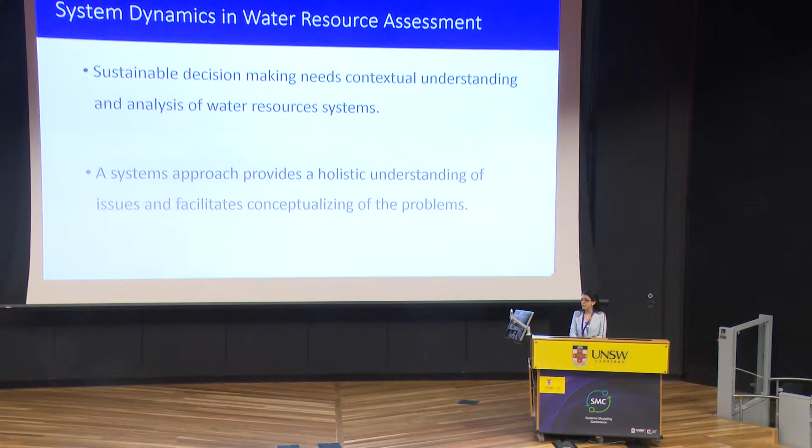One of the main things that we need for sustainable decision making is understanding and analyzing the water resources system and understanding well how the system is working. The system approach makes a holistic understanding of the system and facilitates conceptualizing the problems.

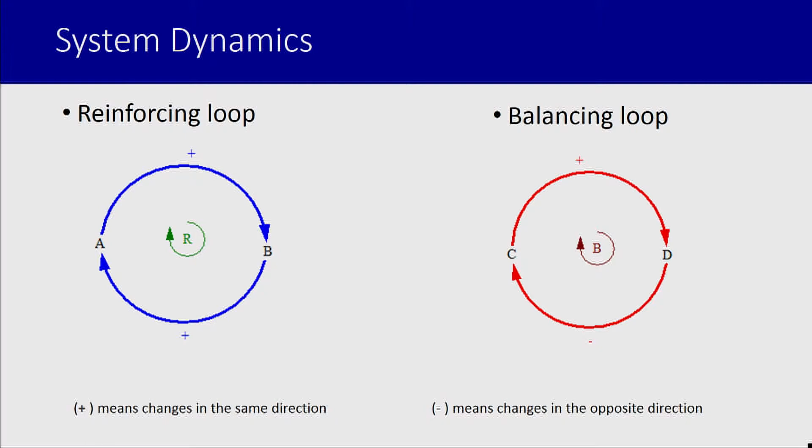Just reviewing the two main fundamental loops of systems thinking. In system dynamics, we have two different kinds of loops. I'm telling this just because I'm going to use it a lot during the presentation. Reinforcing loops are the loops that empower themselves, and after a while, they will be increasing or decreasing rapidly. Balancing loops are the loops that try to control the systems. They control and balance the changes in the system.

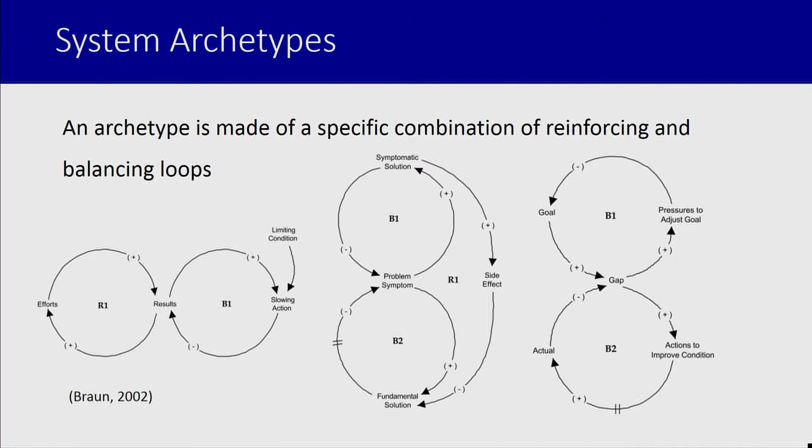I'm going to use system archetypes in one application in water resources management. But what does archetype mean? An archetype is made of a specific combination of reinforcing and balancing loops. It can be made of two or more balancing and reinforcing loops together. Each of them tells a story and a pattern of the behavior that the system is showing.

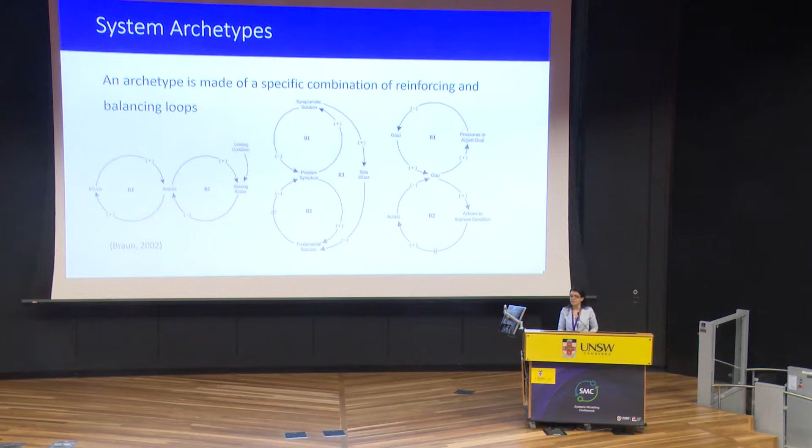These archetypes usually are common stories that occur repeatedly in different contexts. It can be in water resource systems, in social problems, in business, management, everywhere. Many of them are recognized, and for each archetype, we have a selected solution. So if we recognize the archetype, we can find out how we can stop it and how we can control it.

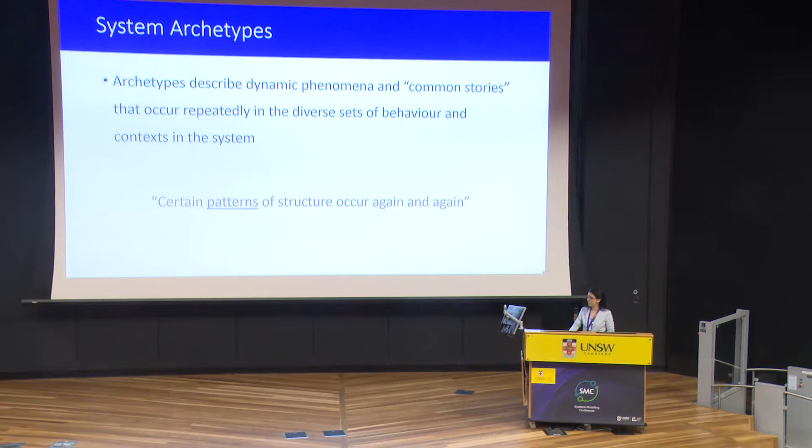Recognizing the archetypes will give the decision maker insight into the potential future consequences and side effects of their decision. And it can help them understand the root causes of the problem, not just the impact and the surface of the problem. At the same time, it can be used as a conceptualizing technique for further, more detailed modeling. The first step of breaking any dynamic archetype in the system is to understand them well.

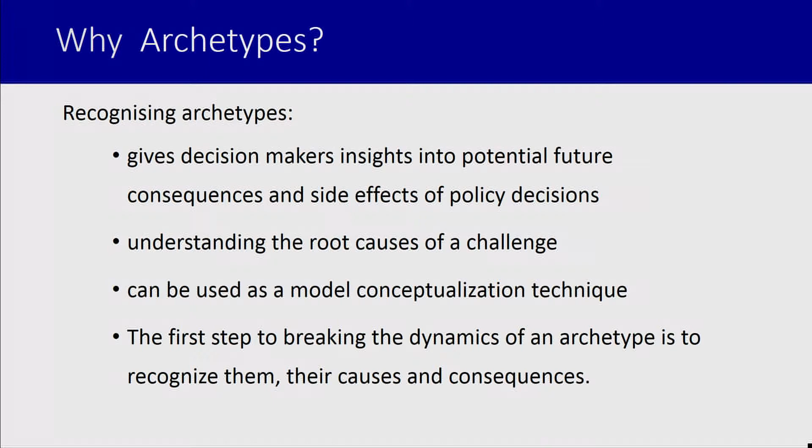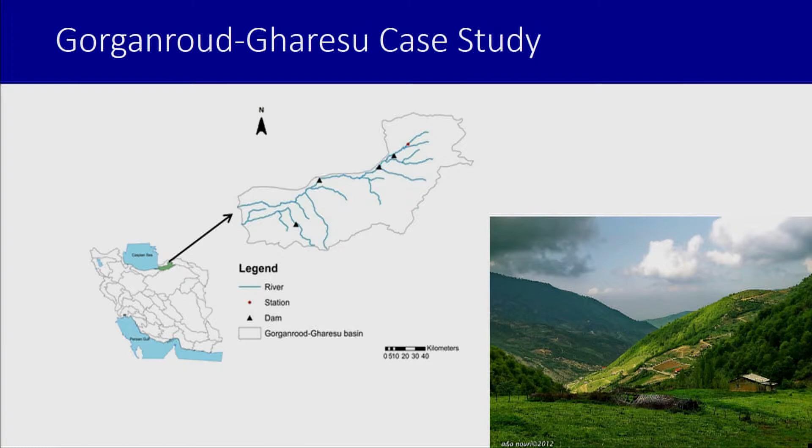The case study where I used this method is the Gorganroud-Gharesu case study. It is located in northeast Iran, next to the Caspian Sea. The basin has a mild climate with good rainfall. Everything is good in this basin, based on the environment. But it has many problems as well.

The Gorganroud-Gharesu economy is basically dependent on services, which is mainly tourism, because it has a good environment, dense forest, beautiful mountains. Besides that, they have good agriculture as well, and a little industry.

I used a simple methodology for system dynamics analysis of this basin. I started with a pre-assessment step, which means that I had a field visit. I spoke and had interviews with the people who lived in the basin, with experts, decision makers and managers, and I got their first idea of what the challenges in the basin are. Then I reviewed the reports and research in different sectors like environment, ecology and social, focused on the water resources.

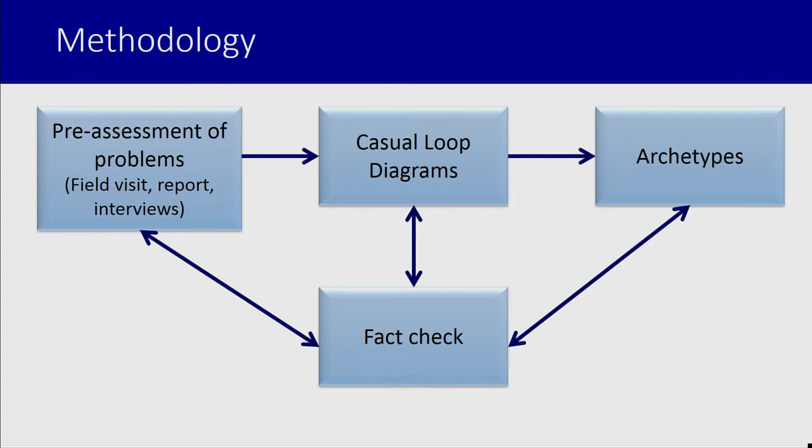Based on this pre-assessment, I made the detailed causal loop diagram, and in each step you should check the facts, because sometimes people will tell you something that is not based on true facts, it's based on what they guess. So to prove that, you need facts, even if you find just one report or the data. Or you can refer to the people's speech, but only if it is repeated many times.

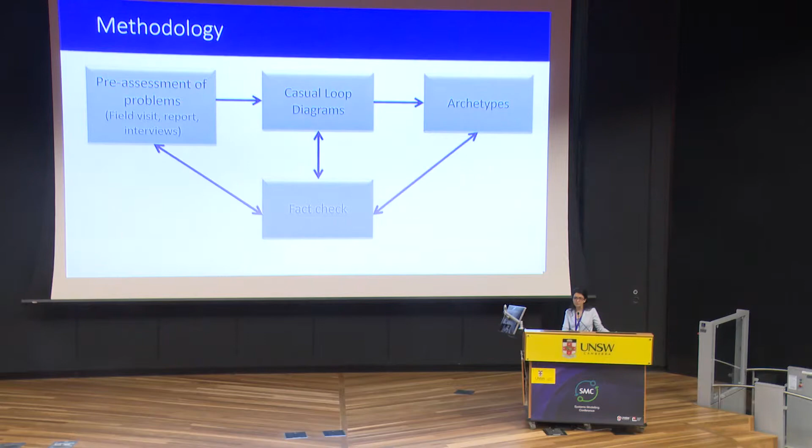Based on this fact check and the causal loop diagram, I got the archetypes and started to speak about what these archetypes mean in this case study and how we can use them to do the water resource assessment.

Okay, the main issues that I gained from the interviews and the reports were, first of all, growing water demand. It means that in the past years, like 50 years, many dams were built in this basin, and many wells as well. But all of the time, we had demand that is not covered. So always we had water shortage. And this demand is growing.

The other thing that people mentioned, but I didn't find any fact for that in the first step, was land use changes. People said that the forest is going out, we don't have enough forest, we don't have the forest as we did 50 years ago. And if you just have a look at the Google Earth picture, you find out, yeah, within the dense forest, you find a point that is like somebody cleared that area. And it's agriculture area, or you can find villages, or you can find something like a factory or something, which needs to be analyzed more.

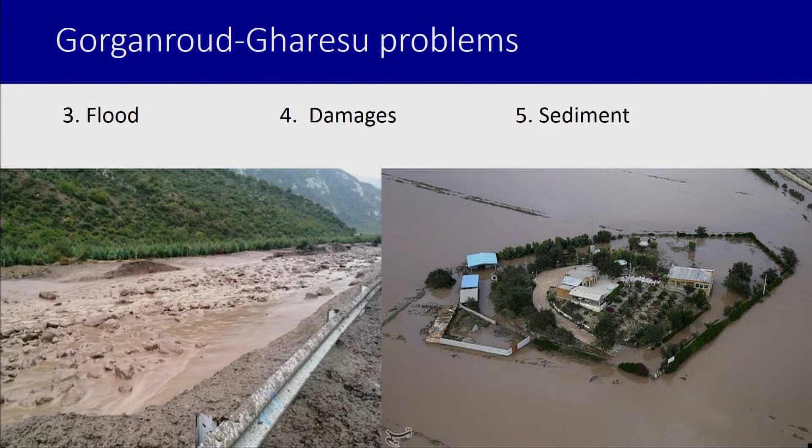Besides these things, every year there is flood in this area. Every year in the middle of the summer, a huge flood happens. In the last 10 years, it happened several times, and each time the damage was more than the previous time. And at the same time, people said that, oh, we have sediment problem. The dams are filling up with the sediment.

People speak about all of these problems and challenges separately. They said that we have flood problem, we have sediment problem, and different decision makers start to set up teams and researchers to find out the reason of the sediment or flood or water demand problem. But we start to think about all of them with each other. Let's see how systems thinking can help us to understand these problems and challenges better.

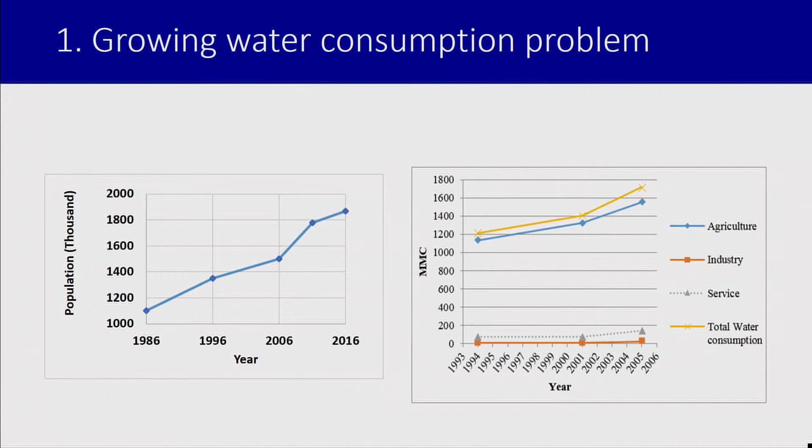If we look at the data, we find out during the last 40 years, the population of the basin grew up so rapidly, and at the same time, the water consumption increased as well in the different sectors, but agriculture was the main one. This is the causal loop of the water consumption problem. It's a detailed one. Basically, it speaks about the main three economy sectors that I mentioned before: the industrial water need, the services water need, and the agriculture one, and how they are reinforcing and increasing during the time.

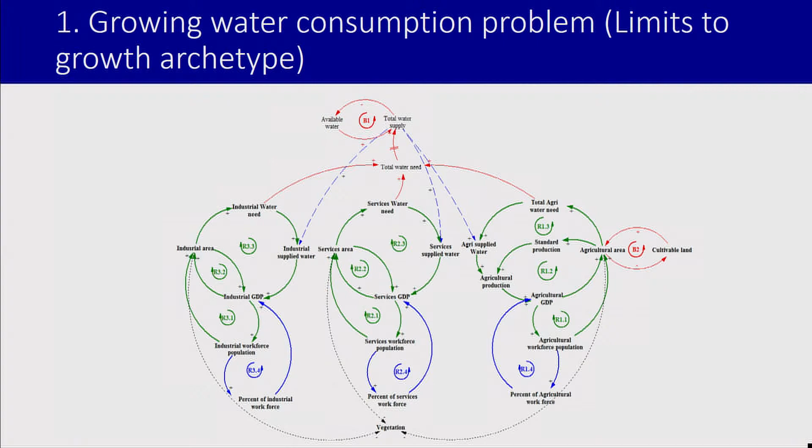Which means that when you give more water to industry, it will produce more GDP, and after a while, it will be richer, it will grow up, and more people will start working in the industry. And this reinforcing will continue. At the same time, these reinforcing loops are using the same limited water resources which cannot cover this loop forever. And sooner or later, this system will collapse.

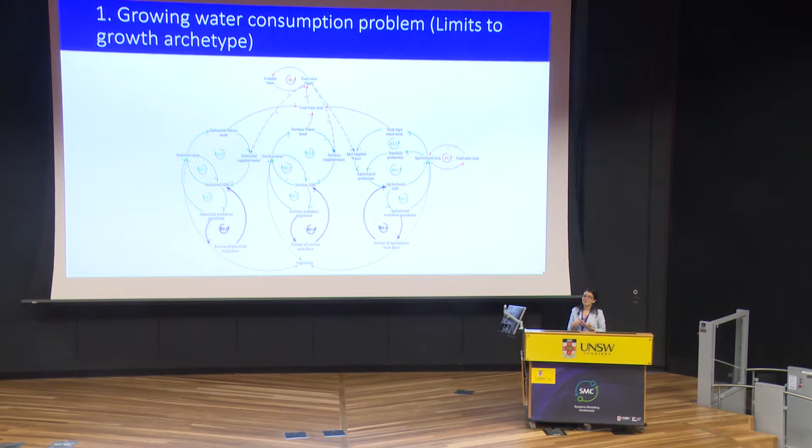Showing this detailed causal loop to the decision maker will make them confused. It's so complex to be understood. So I made it a little more simple. This one shows the main idea of the previous one, which is the limits to growth archetype. The limits to growth archetype tells the story of the problem when you start to use a limited resource, which couldn't continue forever. And if you don't control the reinforcing loop, this system will collapse.

So it will give the decision maker the idea of thinking about how they can control the driver, and show them what is the driver of water demand. In this case, the population was the main driver of the water demand problem.

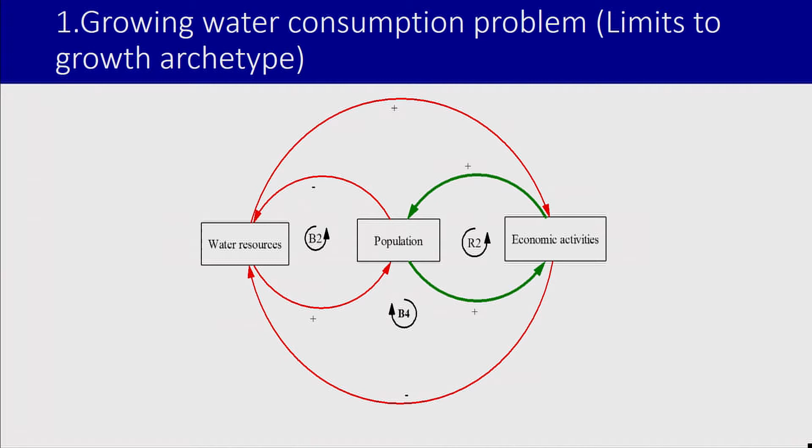If we think about the water demand problem in another way, we find out each time that we had water shortage, people start to think how they can supply more water for people. So they made a dam. After a while, there was water shortage again. It happens some years after that. So they made the second dam. After a while, it happened again, the third one, and then the fourth one.

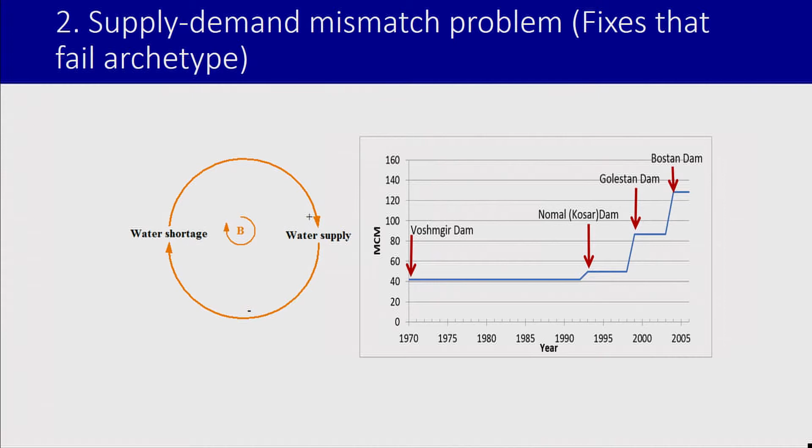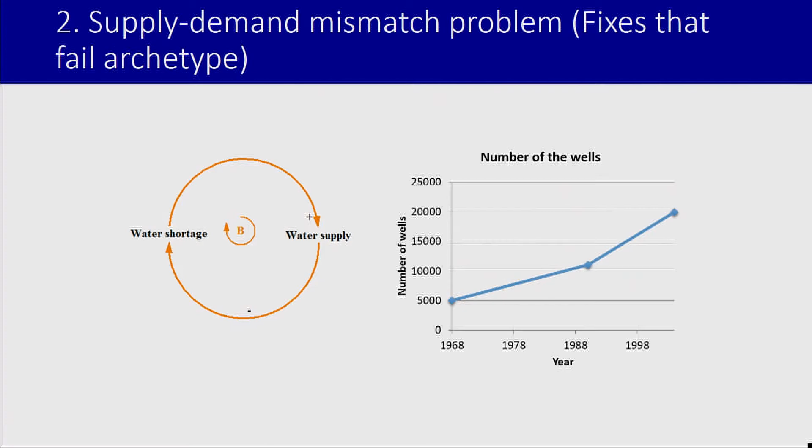Oh, the dams weren't enough, so they started to make wells. The number of the wells in this basin increased rapidly. Besides this data, we know that 50,000 illegal wells were built in this basin. So it means that people are using more and more water.

But we tried to solve this problem several times. Why does it come back to us rapidly? We call this problem the fixes that fail archetype, which means that when you fix the symptom of the problem and you don't pay attention to the fundamental driver of the problem, it comes back to you after a while, sometimes bigger and stronger.

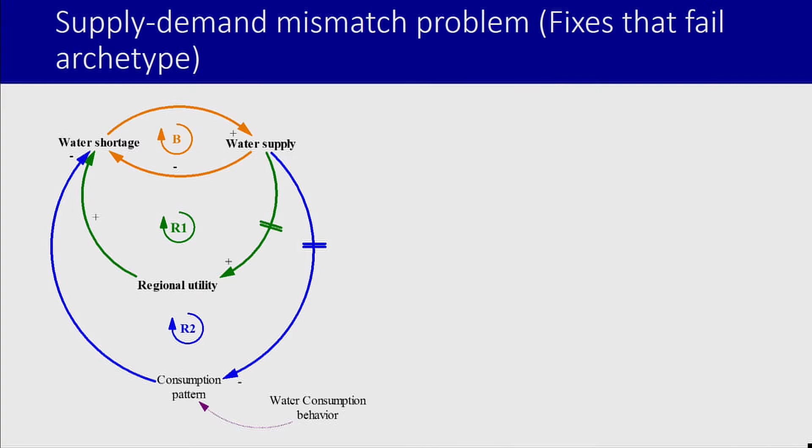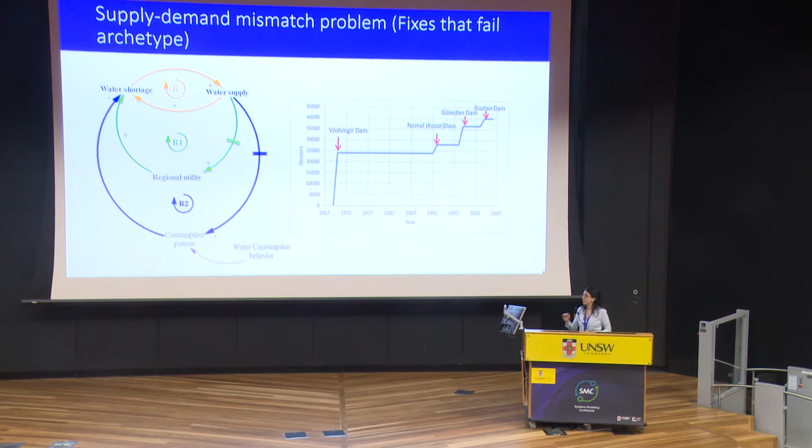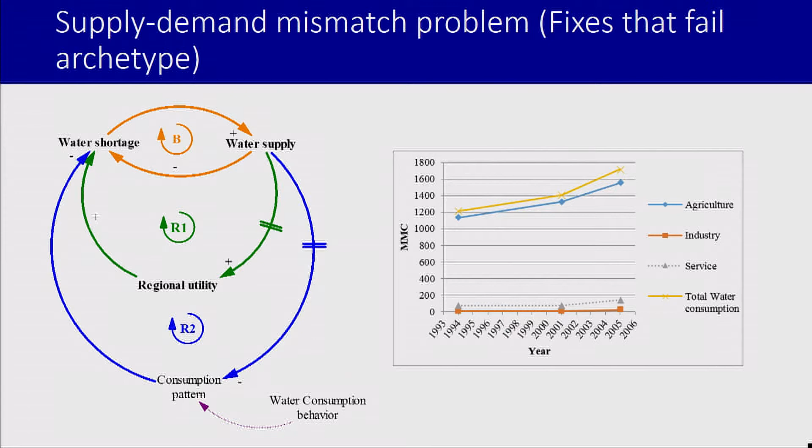In this case, when people supply more water and cover the water shortage, it gives people the wrong message that we have enough water. So they continue the way that they used water, and they continue that reinforcing loop. So we can see that each time the dams were built, the agriculture area increased as well. And this is the same data that shows that the consumption of the water increased as well.

In the case of the flood problem, decision makers usually tend to use the constructional solution for this problem. So each time they had the problem of the flood, they think that making dams or dikes can help to solve the problem.

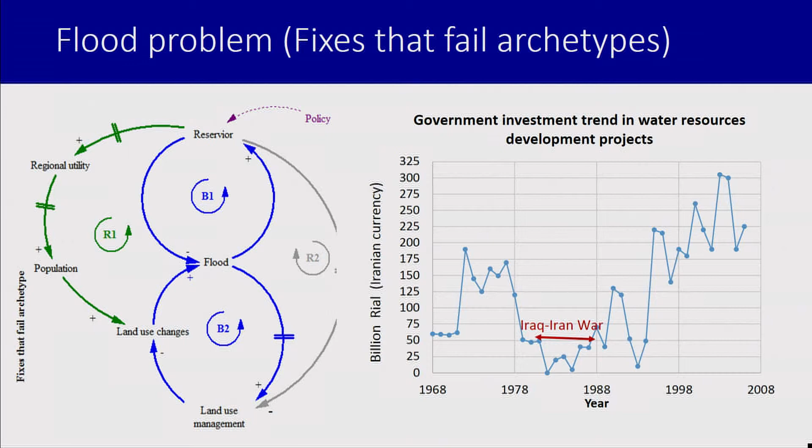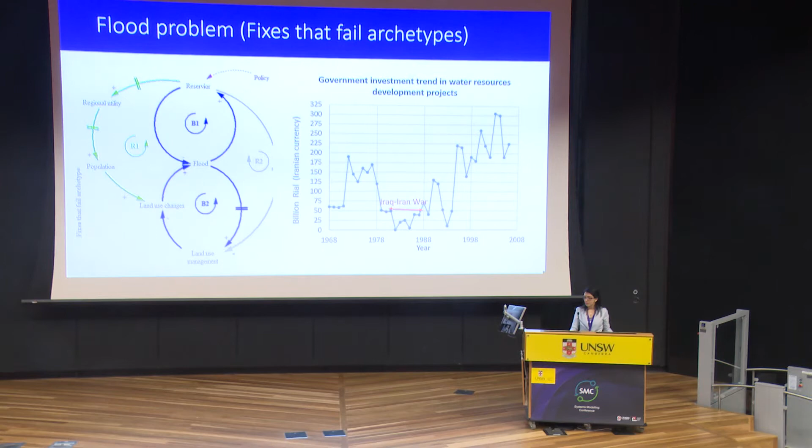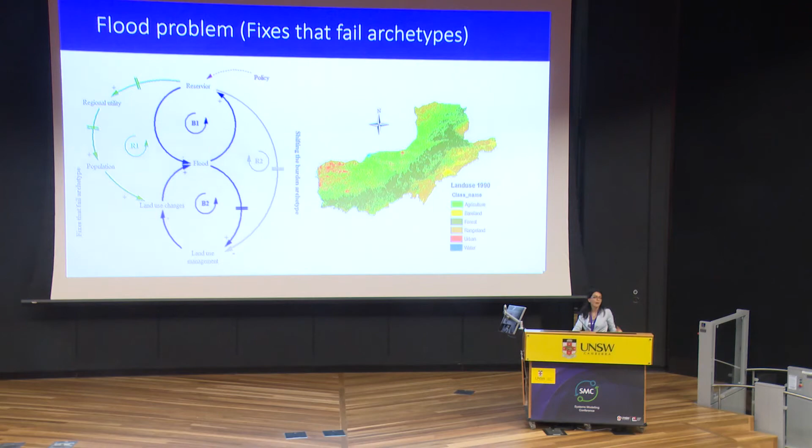By making dams or dikes as a short-term response to the problem, the impact and symptom of the problem was cleared. So after a while, people forgot that there is a problem, which is flood. So they forget about the fundamental, long-term solution, which can be land use management. This is the data of the investment in construction or development projects. And as I said, we had the land use problem. Nobody paid attention to the connection between the land use problem and the flood problem.

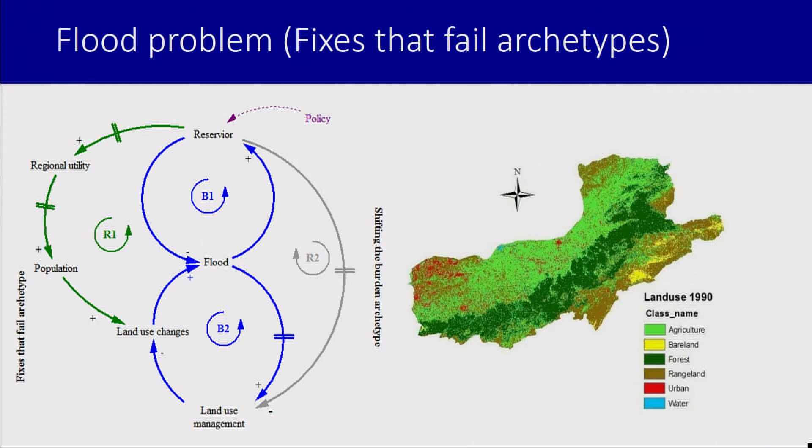So this is the Landsat image of 1990 and the classification of the land use and how it changed over time. And analyzing them shows that the forests really decreased, and it's not just something people think about. It really happened. And at the same time, you can see that the urban area has increased a lot. So it can support what we said, that population is one of the reasons for this problem.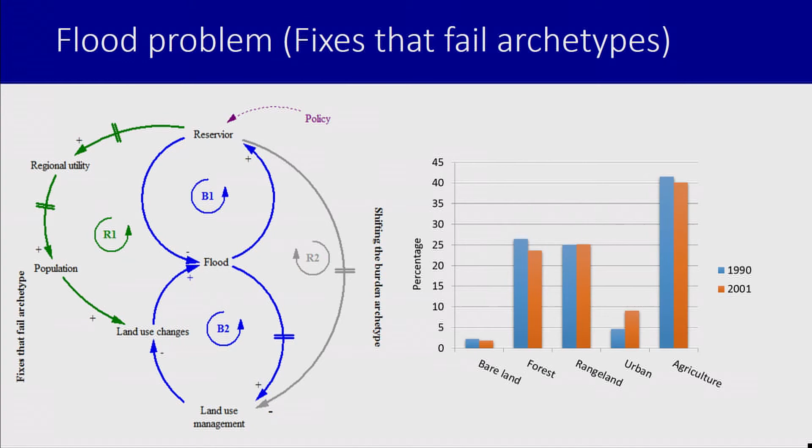Okay, maybe in the conclusion, I would like to say that we cannot solve our problems with the same thinking method with which we created them. In this case, the decision makers or people who manage and plan this area use a thinking model which tends to use constructional solutions and not pay attention to the long-term solution. And they think about the problems as isolated problems and not connected ones.

So maybe the main problem of this basin is not the increasing demand or flood or land use problem. The main reason can be the lack of an integrated approach in management and decision-making. So, yep, thank you.

Any questions for Fateme? This just runs parallel to the Chinese story in the news recently about the lake that closed businesses, and people running around saying what am I going to do with my hotel, because they couldn't sustain the lakeside businesses anymore. With your particular scenario, is it going this way, where you say this is our threshold, we can't go over it and it will be closed, or is there a different solution where you can balance it? And can we balance it for the Chinese as well?